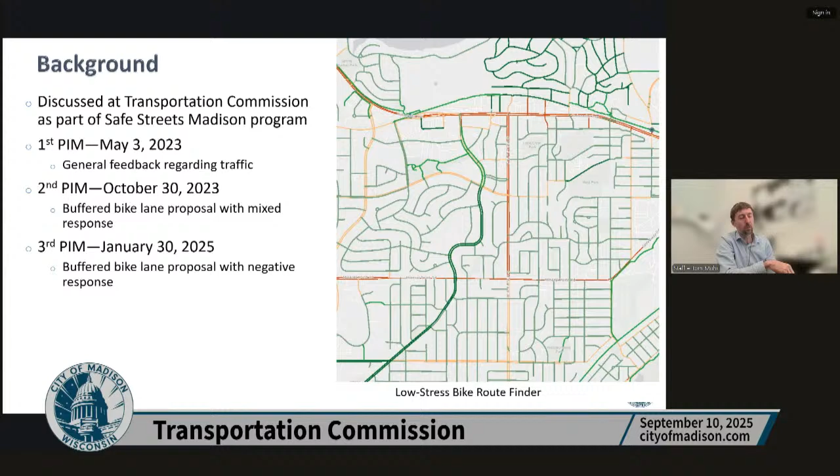We had a big attendance, over 100 people attended, and it was just a strongly negative response. So we left that meeting going back to look at different options, and that's where we're at right now.

Some other background that we shared at the public meetings and will refresh here: we have a complete green streets guide for the city of Madison that we've adopted. Within that, there's a modal hierarchy that places parking at the bottom, pedestrians at the top, bikes in the middle.

Midvale would be classified as a boulevard, although it's not. I wouldn't say it 100% aligns with the boulevard classification because of the single family residential and many driveways, but it's pretty close to that. So that's the classification.

Here are the different preferences for boulevards: sidewalks, possibly a shared use path on one or both sides, typically 2 travel lanes in each direction and medians. Protected bike lanes would be preferred, with median width to allow trees, which is what we have right now. So it's pretty close to that right now, except for the bike facilities.

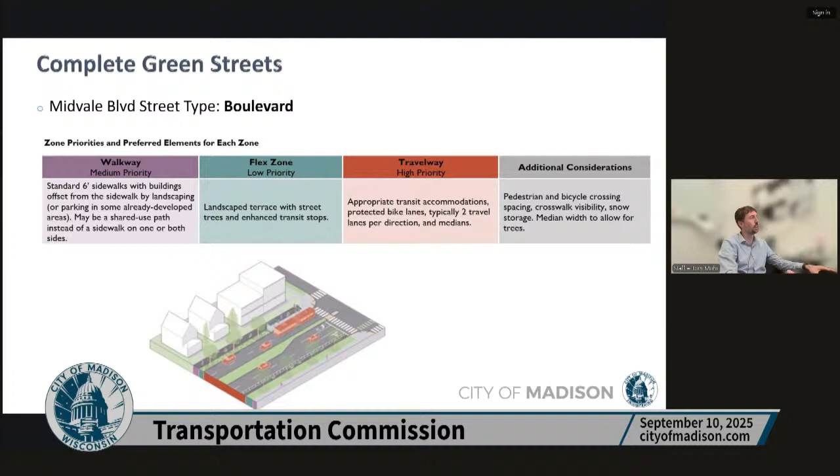There is no dedicated bike facility right now. We have a draft all ages and abilities bike network, but Midvale is not identified for that network—though this is just an initial draft.

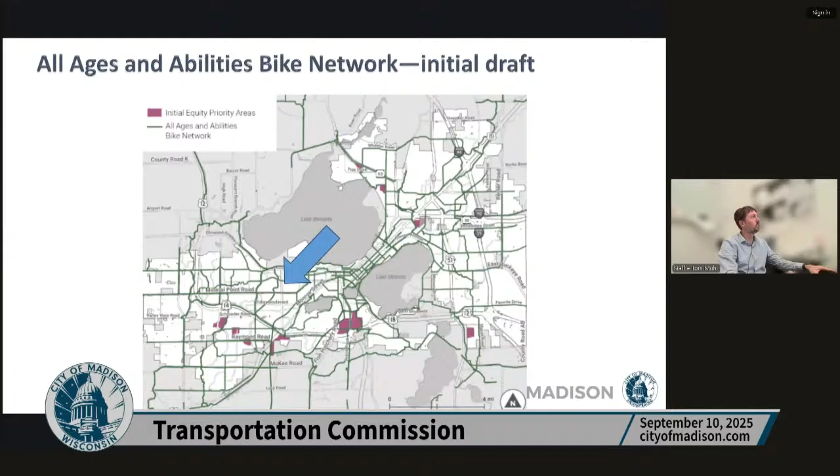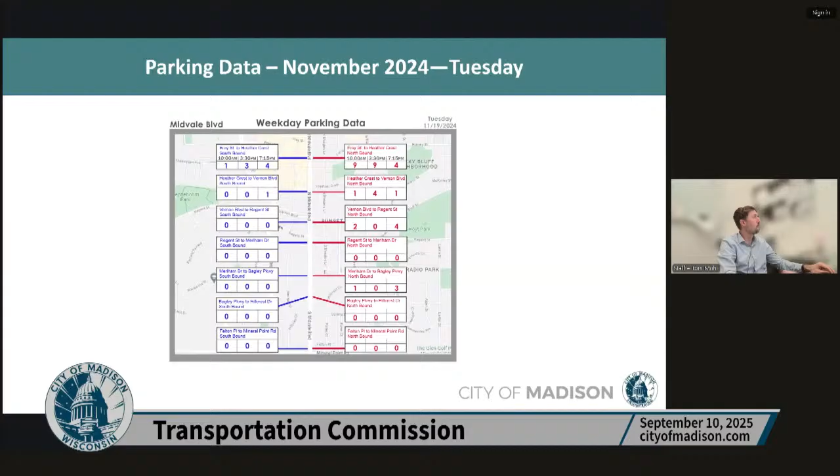So the design that we showed was a buffered bike lane: a 7-foot bike lane with a 3-foot buffer, narrowing up the travel lanes a bit but maintaining the 2 travel lanes, and removing the on-street parking. The reason for this is that Midvale's street width is about 3 feet too narrow to get a bike lane adjacent to a parking lane. South of Mineral Point Road we have that width and that's how it's marked out, but north of Mineral Point Road, along this section, it's a little too narrow.

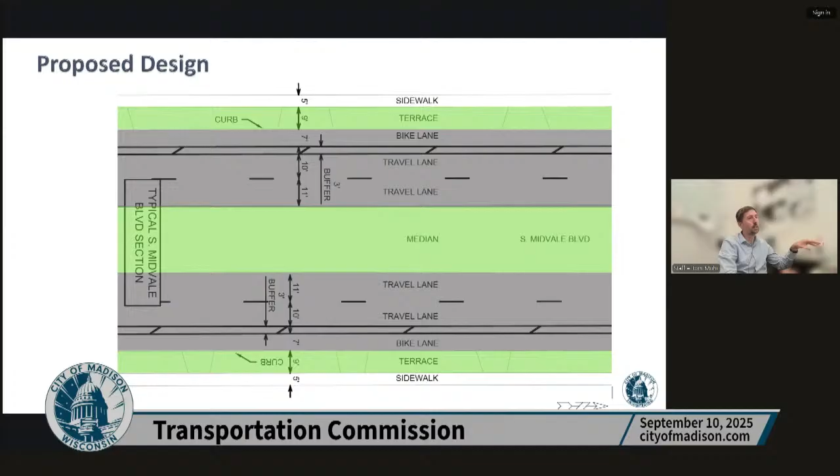So here's a plan view of that proposal that we showed at the public information meeting. Buffered bike lanes, north is to the right. Where the green box is, that is where we would cut into the median to get the extra width to allow us to have the bike lane next to the parking lane. Cutting into the median here, we wouldn't have to remove any trees. There's just kind of no trees along this area. More of the trees are to the south. So wanted to point that out.

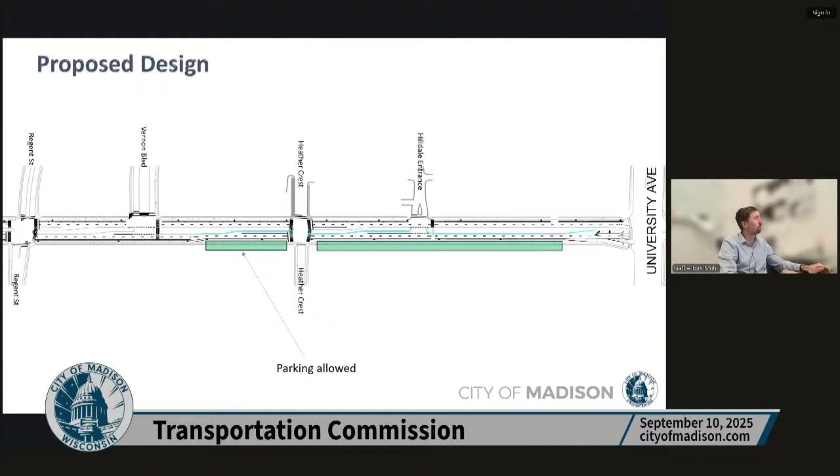This is just showing a little bit of a zoomed in view of that, how that would work. We could provide a little bit of a buffer, mark it out next to the parking lane.

So again, we took this proposal to the January meeting. Very long meeting, very negative overall response. Few people spoke in favor of it. So that's when we went back and looked at different options.

Some of the options that we looked at but dismissed are parking cutouts in the existing terrace. We could do that, but there's only a few locations where we could do that without disturbing trees, and it's also kind of difficult to make it work in the existing terrace. We could, but we'd kind of be choosing which areas would get parking and which wouldn't, and it's just difficult to do along that entire stretch of Midvale.

Another option was peak hour parking restrictions, like what we used to have on Doty Street during the PM peak, where it's kind of like a floating or moving bike lane. During the midday it would look like this, where it would be one lane with a bike lane and then a parking lane. And then during the peak hour, we would remove parking and have the bike lane shift over to the curb lane. But what we found in our one example of this that we previously had on Doty Street was that it was confusing. We had an overhead electronic sign that changed throughout the day to try to reinforce where the bike lane was, but overall it was confusing, even with the high utilization of parking.

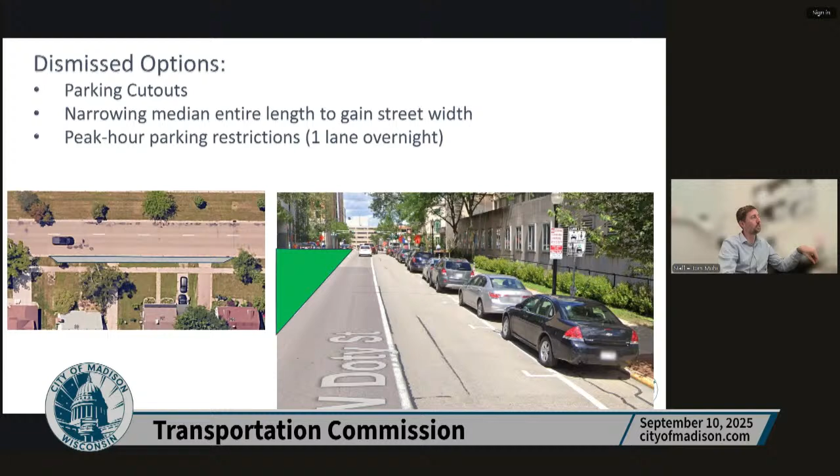So out on Midvale, there's very low parking use, especially to the south. So I think it would be difficult to get the message across to the public, both to people parking and to drivers, that it's changing throughout the day.

We looked at permanent lane reductions. We looked at hourly volumes in both directions to see what we could do if it was possible to permanently reduce a lane. Overall, it would be difficult. It may be possible under existing volumes, but volumes are increasing kind of to where they were previously. We have data going back to 2013, and it's part of the national highway system, so it's one of the few non-state highways that is on that national highway system. That also complicates things with doing a permanent reduction. But it is something we looked at.

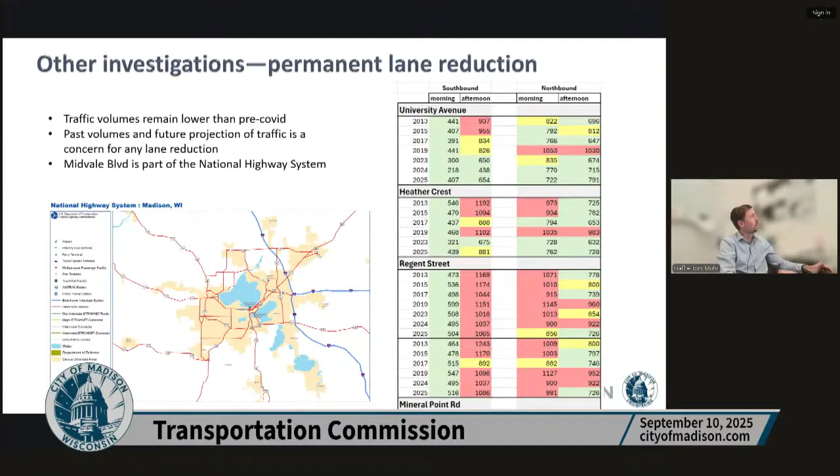So then we came up with three different options and put this into an online survey. This survey went live end of July, and it was available for five weeks. It just closed a week ago.

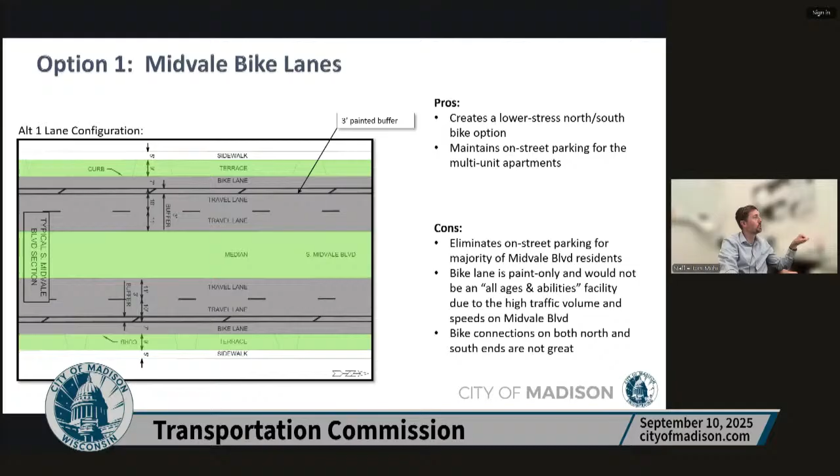So the first option was that initial proposal of the buffered bike lane, where we kept the parking on the east side. Again, this is what I showed previously. So this is what we included in the survey. We included the pros and cons and kind of explained the different options to people.

Option 2 was kind of partly using Midvale, but just the southern portion. So we would have to remove parking along that southern portion from Mineral Point Road to Bagley, and then create a bike boulevard connection up using Meadow Lane over to Blackhawk, and then using the new crossing that we are installing right now at the Blackhawk University Avenue intersection. There's going to be an RRFB there to help pedestrians cross University Avenue.

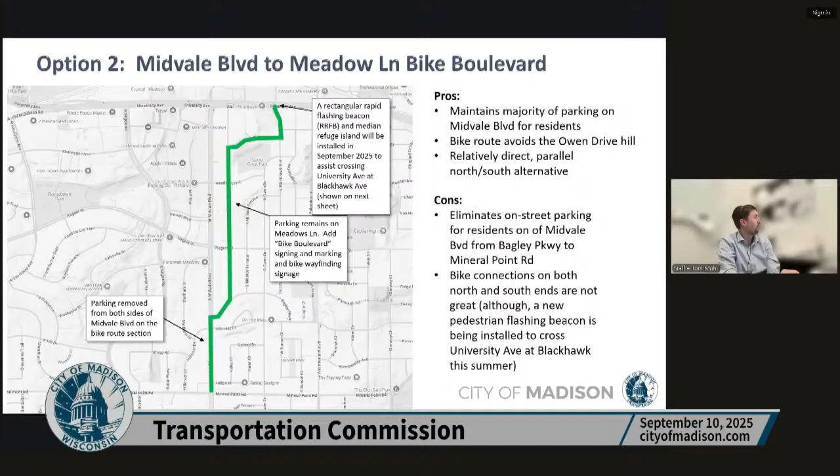But parking would remain on the rest of Midvale, and parking would remain on the other streets, only removed on Midvale to the south. So here's that new crossing that's going to be finished up this month.

The third option was to look at alternative north-south routes for bikes from Midvale, and instead use Owen Drive and Segoe Road, and then especially focus on improving the crossings of Mineral Point Road, because that's kind of the dividing line that makes these routes difficult right now.

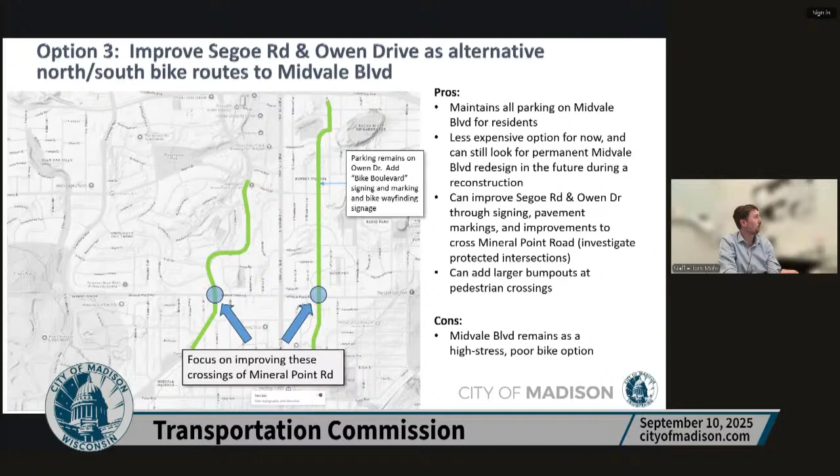So at Segoe Road, we could cut into the median at the intersection, provide some protection for the bike lanes at the intersection. This is feedback that we've heard from different users, that especially right turning vehicles kind of use that bike lane, and it gets crowded there. So we could provide some protection.

And then over at Owen Drive, we could get bikes off the street up to the crosswalks, where they could use the existing rapid flashing beacon on the east leg and install buttons on the west leg to provide that space. We'd install a new concrete island for a bit of a refuge, just to make this north-south route easier.

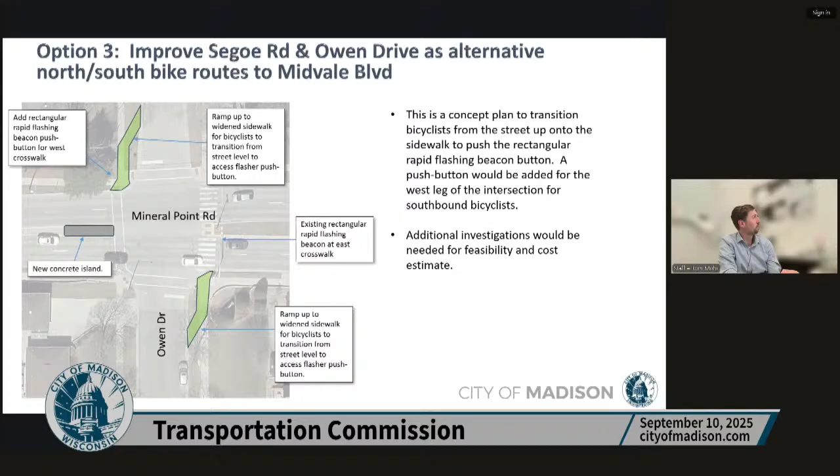With all the options, we provided that we can improve the pedestrian crossings regardless of what's chosen. We plan to add RRFBs at both Hillcrest and further north at the Hilldale Mall driveway. And then we can upgrade the existing signals—those are really old, really old infrastructure where we're really limited as to what we can do.

So we could upgrade those and change them to audible pedestrian signals, and look at upgrading the pedestrian crossing—just the curb ramps, median noses, and bump outs on either side of Midvale.

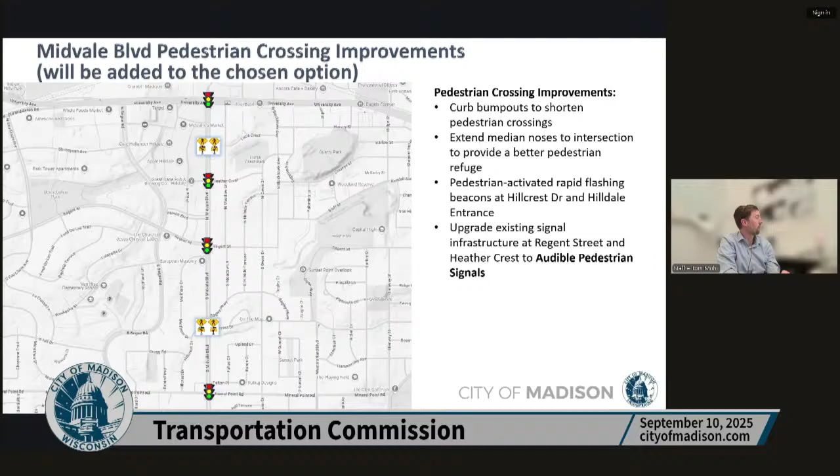So again, option 1 is the bike lanes all along Midvale. Option 2 is the Meadow bike route. And option 3 is Segoe/Owen Drive.

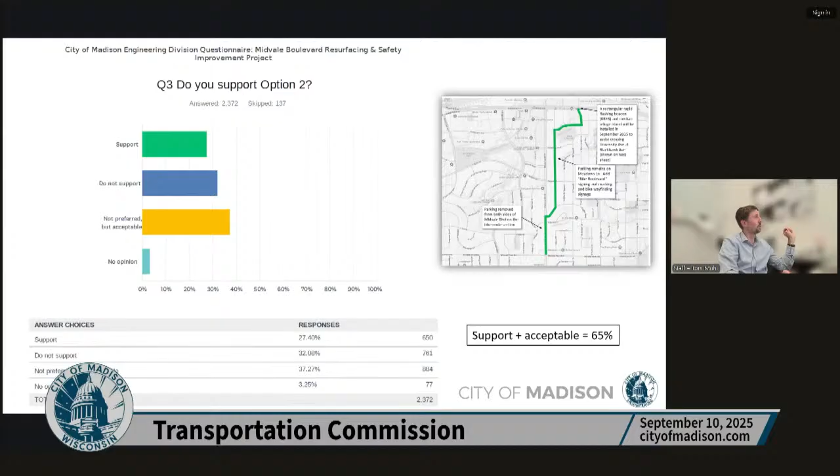So option 2: support plus acceptable is 65%, with 32% not supporting. And option 3: support plus acceptable is 74%, with 24% not supporting.

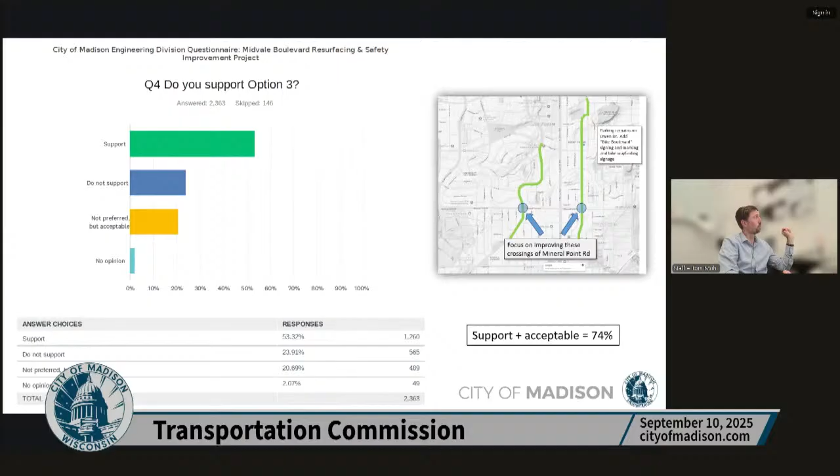So the last question was, what is your top choice? Option 3 won that with about 54%. But a huge response in the survey—over 2,000 responses—which is way beyond anything we've seen from previous surveys.

And then we did map these—the maps just showing how different areas of the city responded. So just the Midvale residents, this is how they responded, with 56% going for option 3 as their top choice, 23% option 1, and 18% option 2. So then just the Sunset Village neighborhood plus Midvale residents, this is how they responded.

So a little bit less support for option 3, a little bit more support for the other options. These are all city responses, excluding the people directly on Midvale or in the neighborhood, and it's still pretty similar. So I just wanted to show that there's not a huge variation in how people voted based on where they live. This is all citywide responses—48% choosing option 3.

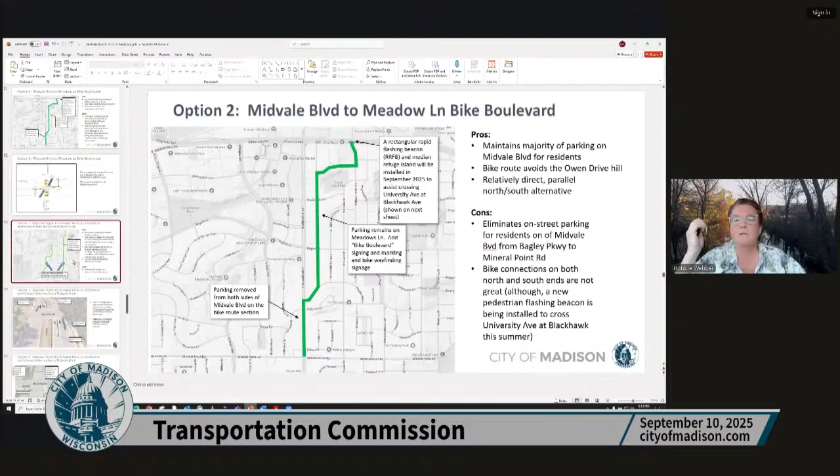Yep, okay, and then let's see. For Owen, they end up... I can't see actually where Owen comes out on. I mean, I see that there's, that little box is kind of, okay. So if you're on Owen and you want to continue south, then it's a little small because I'm on a laptop. It's hard for me to see.

Yeah, Owen going south. So this was, if we were to choose this route, we would look into anything more we could do, but Owen does have speed humps right now. Keating to Caromar then connects to the school. But we could look into further options further to the south for that route.

I mean, we'd pretty much be limited to like the bike boulevard treatment for this signing and marking. But if somebody wants to get further south on Midvale, then they somehow have to make a left at some point, an unsignalized left onto Midvale, right? Oh right, if you're on Owen and you're eventually making it over to Midvale? Correct, right. I guess they could go down all the way to Tokay.

Okay, yeah, I was having a little hard time with the map because that text box was over it and I couldn't quite see where it ended. Yeah, yep, so you can go all the way down to Tokay. Yeah, that works. Okay, so then...

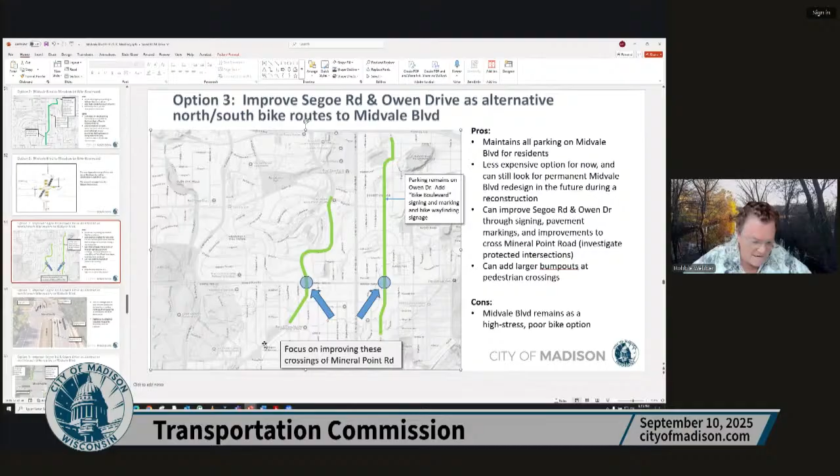On Segoe, have there been any discussions at all about a crossing of University Avenue and a route that would connect to the Blackhawk path on the north side? I mean, you've got what is that now, the state, is it Department of Revenue in that building? I don't know who's in that building now.

So we're talking right here at Segoe. We have not looked into anything further here. I guess right now, as a bicyclist, the proper way to do it - you can cut through the property, but the official route is to use Old Middleton, use the ramp to get to the path, or I guess depending where you're going, you could go east on University Avenue. If you're going east, yeah.

Yeah, so then you're kind of left with making a crossing somewhere along this point. So part of our issue with Midvale is that north of Midvale is the village, so we kind of need their buy-in to do anything on Rose Place or anything to the north here. I was just wondering because when people are suggesting Segoe, you just kind of get dumped, right? You get dumped onto a giant road, and a lot of people are trying to make that connection to that path or to Locust Street.

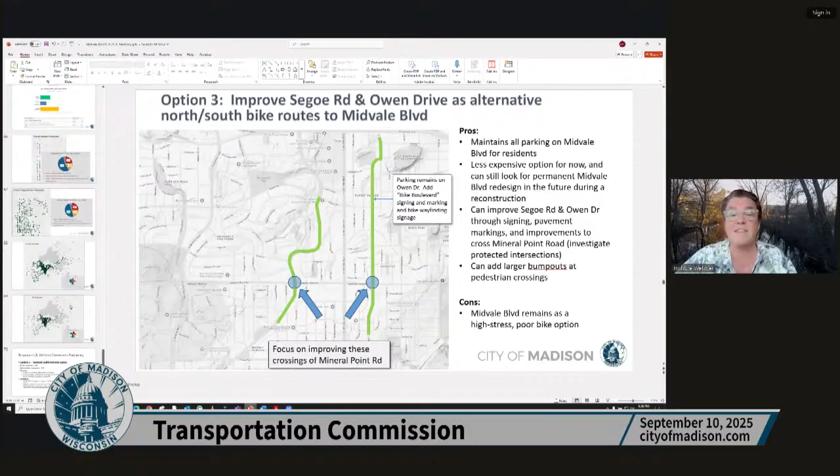I mean, I will tell you, because I do access the credit union and Walgreens and Pick and Save and the Ace Hardware on Midvale and Century, and the Great Dane Pub and Cafe Hollander, and many other things in Hilldale, I'm going to keep riding on Midvale, because that's how I cross University Avenue. And it's the only way that I can cross at this time.

And I'm not going to ride on the sidewalk, especially on the west side, because I've tried that, and there are a lot of pedestrians that come out of Century and walk up the sidewalk to get to the BRT stop, because that's where all the university students shop. Or not so much Century, but Target, and they also shop at many other shops. So that sidewalk is very busy. I'm not going to use that sidewalk, which means I'm on Midvale, and I'm going to continue to be on Midvale.

But I'm a much slower cyclist than I used to be, so I'm going to be in people's way, but that's the only safe way that I can see to access those destinations from where I live. And I'm coming from Locust and Rose Place. I will see if that RRFB works, but I am concerned, which means that would leave people with no way to cross University Avenue from Meadow or Blackhawk, and I think that's a disservice.

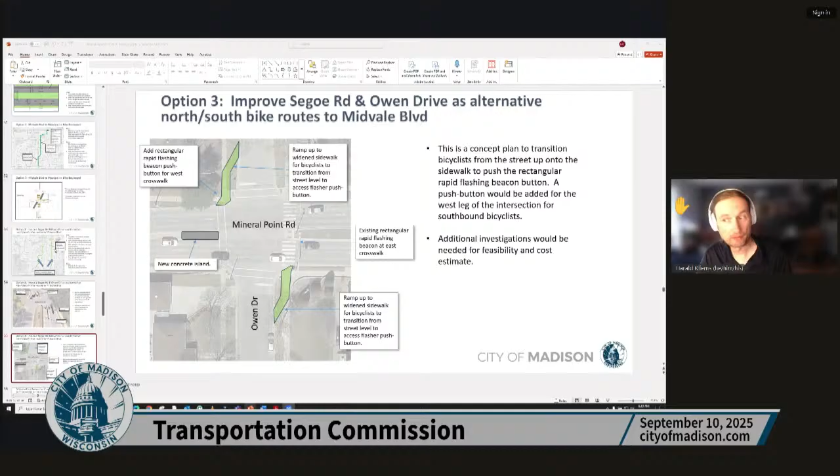With regard to the improvements presented in options 2 and 3, clearly the way the survey was phrased, and I think that's how people also understood it, is either you get bike lanes on Midvale or you get the other improvements. I'm kind of confused, why is that a budget thing? Do you see it as if we improve Midvale, then we don't have to make the other improvements? Can you explain how did you come up with these options that were presented as exclusive of each other? At least I think that's how I understood them.

Good question. It's kind of where should we put our focus? If we put our focus on Midvale, budget wise, we're trying to keep this within a resurfacing project, so we would not include other things as part of this project. We would probably separate that out into a separate project and not have it paid through the resurfacing contract, just for budget reasons.

So it's more similar to, say, the BRT project on East Wash and then the additional Safe Streets project that were kind of linked to BRT and not having a facility on East Wash, but they were separate contracts, came back to TC, happened in different years. Some of them we learned were more difficult than we anticipated. So that's probably what we would do here, if everyone's good with option 1, we'd probably come back with Safe Streets projects to look at Segoe and to look at Owen, and evaluate those through the Safe Streets program.

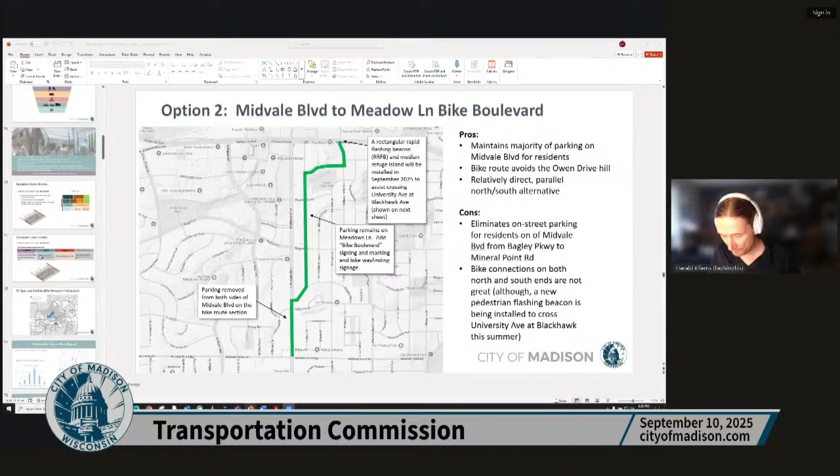Other big picture items: you presented the Complete Green Streets Guide. It's a boulevard, so according to that it should have a protected bike facility. You showed the no-stress bike network where Midvale was not included, but I think some commenters mentioned it, and also in some written comments it was pointed out that the area plans have Midvale as a bike connection. Is that correct? Yeah, I can bring that up separately. The West Area Plan has Midvale identified as an on-street route protected bike facility.

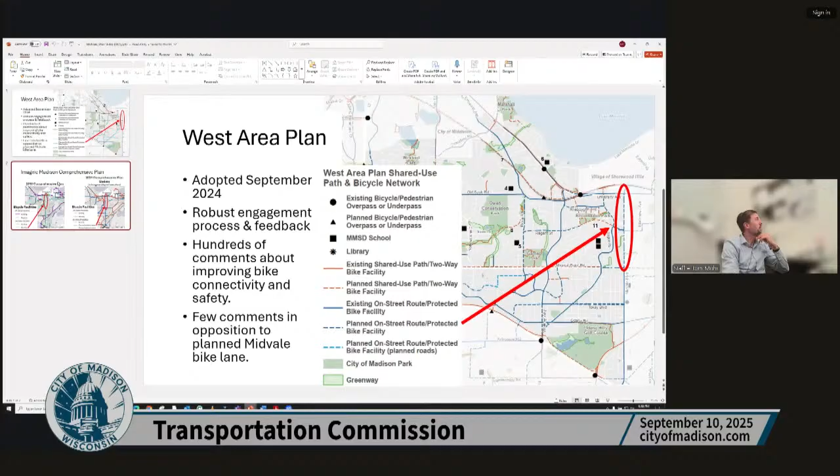This was adopted September of last year. There was a feedback process for that, and at that time there were a few comments opposed to it, but it definitely wasn't discussed at the level that we're looking at it now. And then the Imagine Madison Comprehensive Plan also identifies Midvale. So two different plans here, it was updated to have on-street facilities in the last plan.

Okay, thank you. I mean, I guess you can make an argument, these are area plans, so they don't specify we need to implement this now, so you could argue maybe we'll do it in the reconstructions 10 years from now. But okay, that's good to know that there are several plans that call for low stress bike facilities on Midvale.

The topic of speeding came up, and this was a long time ago in 2023 when this first came as a Safe Streets project. I think speeding was one of the concerns that first put it on the list, in addition to bike concerns or not having bike facilities. Do you have a sense if option one is going to help with speeding, or some of the improvements with bump outs?

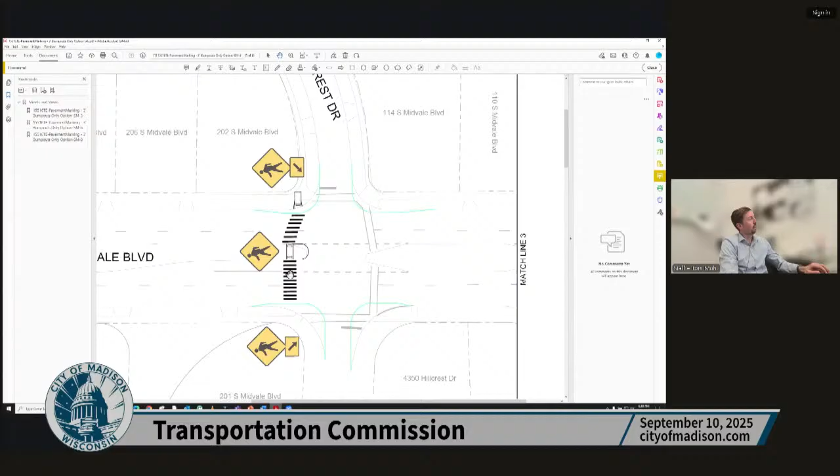Based on experience from previous projects, option one, just a painted line, is going to have close to no effect on speeding. Bump outs, I can show what we've dreamt up for what the bump outs may look like. They're not as big as we would like because we need to maintain the turning radius for vehicles. These are showing 3-foot bump outs. If anything, these would have more of an effect on speed.

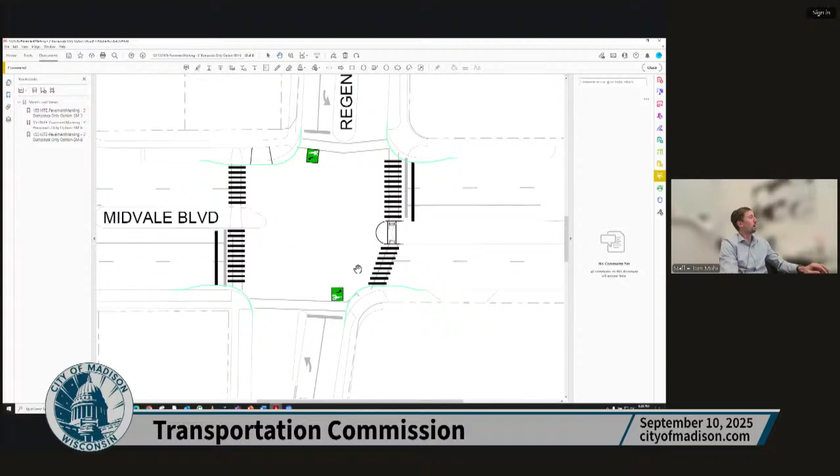So we've got bump outs at Hillcrest, Regent. Again, a lot of these are based off of maintaining truck turning movements to different places, so the truck doesn't have to take the other lane. I think these are also 3-foot bump outs, and then at Heathercrest. So we can shorten up the pedestrian crossings a little bit, might provide some narrowing of the feel for slower speeds.

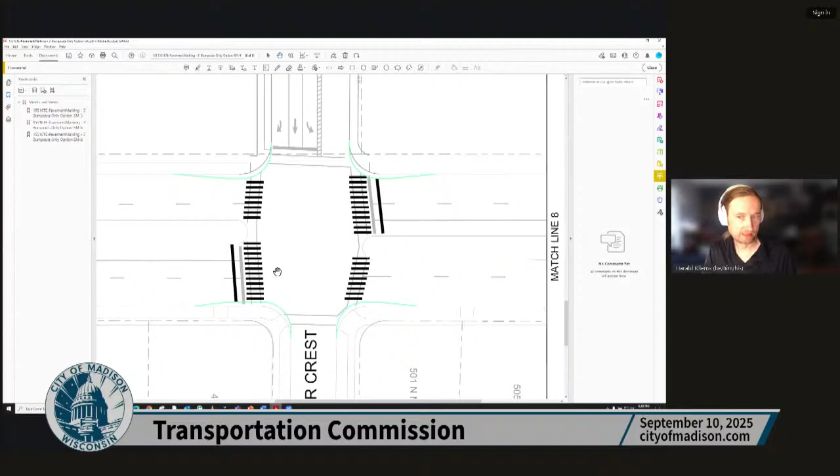Yeah, I mean, in general we have argued that making lanes narrower does provide a speeding reduction benefit. Especially in a case like this, where the right lane looks like it's 20 feet wide when there's no parking. So I would expect that paint probably has some impact.

Actually, one thing I didn't mention that we are planning to do regardless - say we just leave Midvale alone as far as parking and lane configuration - we do plan on adding a lane line or lane lines on the right side here to designate and narrow up the feel of that right lane. A lot of the time, if no one's parked for a block, this is like a 20-foot lane, so we will mark that out to provide some sort of narrowing at least.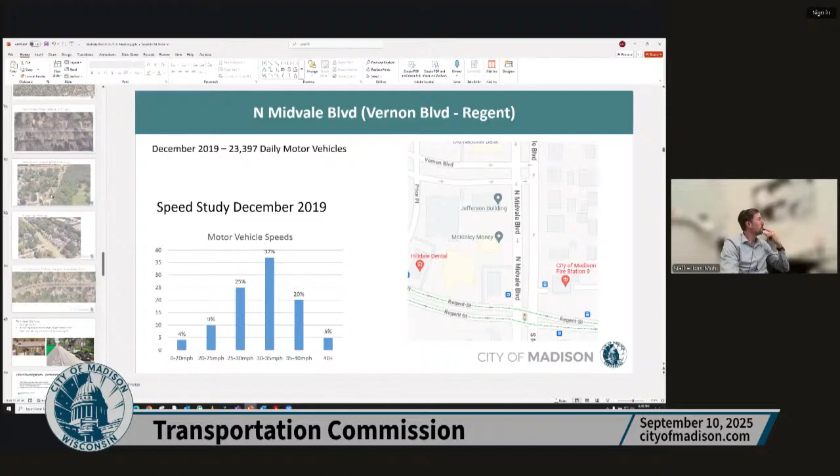Okay, and that maybe ties into my last piece. Can you go back to that slide that showed the traffic volumes? Talk a little bit - some people brought up the lane reduction idea. Yeah, so right here.

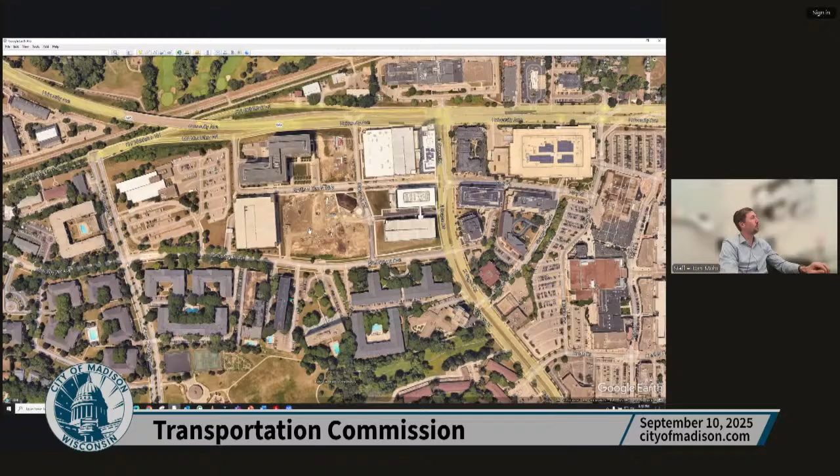But part of this is development at Madison Yards - they did a traffic impact analysis that showed additional volume coming from there using Midvale, and you can see they're still not fully built out here, so they do have some space for more development. And then there's impact to businesses in the Hilldale area. I think any sort of lane reduction is borderline at best right now, and we can at least in this area achieve the same thing with what our original proposal was, to cut into the median. So that's kind of why we backed off of looking too far into that lane reduction.

Yeah, I mean, it was striking to me to see the traffic volumes basically being flat over the whole period. I don't think there was any location where traffic volumes were higher than they were in 2015, neither in the AM or the PM, which is a separate question from what the absolute volumes are. But projections about the future are always uncertain, I suppose.

Okay, I think you started early on that Midvale is classified as a boulevard and complete green street, but it only kind of fits, and I think you mentioned the driveways being what makes it different. A boulevard is supposed to have longer blocks with few driveways.

But there are many driveways here, and that's part of the reason - this was another thing brought up that I could address - the protected bike lane. It's difficult to do any sort of protection when you have this many driveways and this spacing of driveways, because we need to keep in mind we've got to have access to the driveways - people have got to be able to get out and in. So it really ends up in a really disjointed protection. If we were to use curb or something, you can compare it to Segoe Road, where there are very few driveways, so that opened up the opportunity to do concrete protection for bikes with just openings at the few driveways. But Midvale is a lot more difficult for that protection.

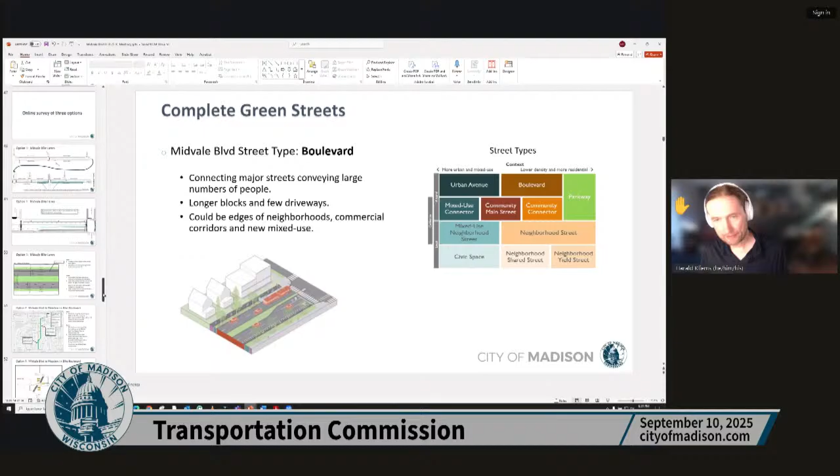Okay, and do you have information on the gradient of the different streets? I know Owen has a very steep section, Midvale has a different steep section, and Segoe is pretty level. That's my rough summary from my own experience.

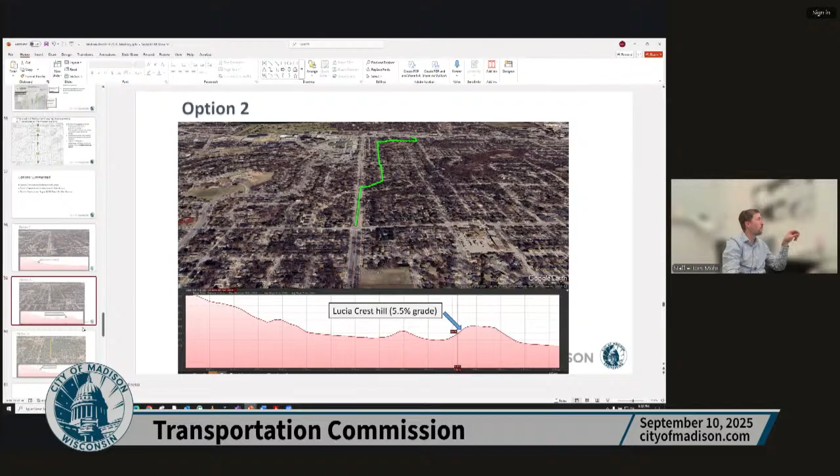With this route, there are some steeper hills, like this one up by Lucia Crest. It's a smaller hill, but still steep for that short period. Owen Drive has the biggest hill - Mineral Point Road is up high, and as you go north you drop down a 6% grade to University Avenue. So Mineral Point Road is generally lower down at Midvale and then goes up, that's the extra grade for this route.

Okay, that's useful. Regarding the Mineral Point crossing, I know a long time ago there was a proposal to potentially reduce the number of lanes on Mineral Point there, and it didn't go anywhere in the end. Is there still some thought on that? Because that would make a big difference for crossing compared to keeping it two lanes in each direction with an RRFB.

Yeah, that's a study we're still working on, so we plan to bring that probably next year. We'll do the whole public engagement process with Mineral Point Road and analyze the data. So that's still in the works, and it's very similar to Midvale - it's a resurfacing project from Midvale to the east. It'll be a similar discussion about what we do with the street, whether we can reduce lanes or provide better pedestrian crossings. It's really difficult to cross Mineral Point Road at a lot of these intersections, and parking utilization is low there too, probably even lower.

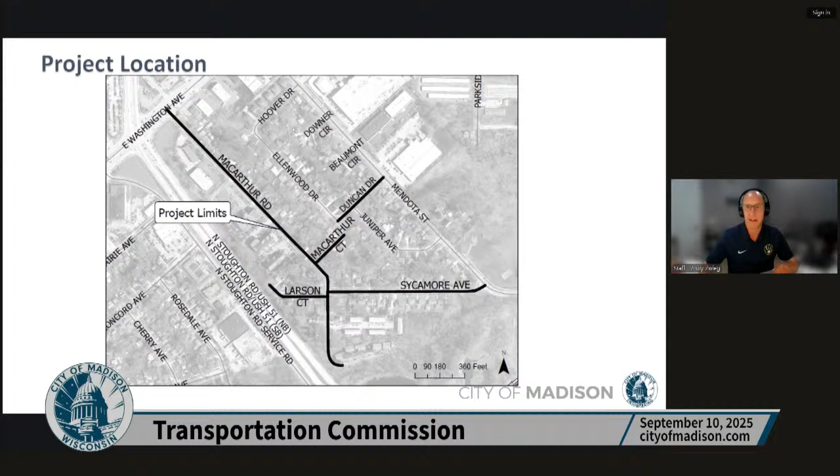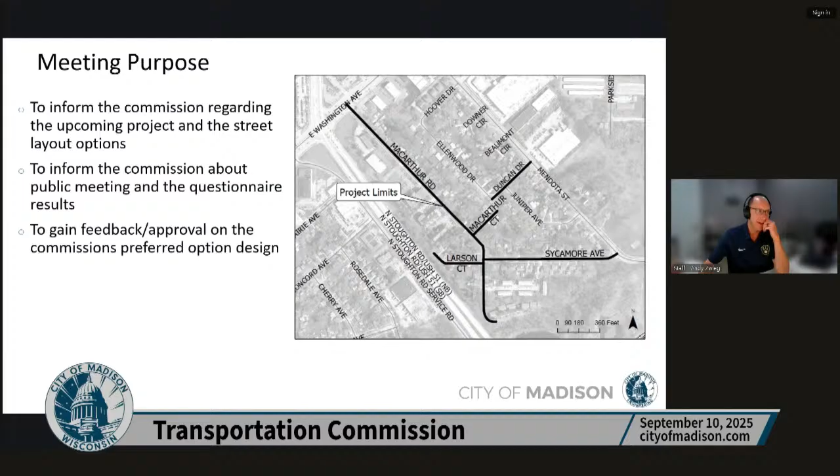We want to inform the commission about the upcoming projects and the street layout options we presented to the public, inform them about the public meeting and the questionnaire, and gain feedback and approval about some of the options we laid out. So where we are in the process: we had a public meeting in October of 2024, a year ago, prior to really starting the project. The alder requested that we meet with the neighborhood to talk about what's coming and how these projects go, since it's pretty significant when you go from no curb or sidewalk to curb and sidewalk. Following that, we had residents ask us to go through a walkthrough around the project, talking about the neighborhood and things residents have heard from neighbors.

That walkthrough was November 19th of 2024. We didn't do anything over the winter because we were waiting on survey for the project, so we started the project in roughly June. We established some geometry and some options, checked in with the alder, got our presentation in order, and had a public meeting on August 27th, 2025, just a couple weeks ago. So right now, the Transportation Commission's next steps would be board approval of plan specs and assessments, and then the council after that.

So we did a speed study. This was traffic engineering - they found that on MacArthur Road, and this is Sycamore here, there were no significant issues with speeding, not a lot of vehicles going over 30 miles per hour. What we've heard from residents is that there is speeding, and that this is a cut-through for folks from East Washington going to MacArthur to get to Sycamore. When I was out there, I would agree that there were cars that were not necessarily driving to their homes, but cutting through MacArthur and Sycamore.

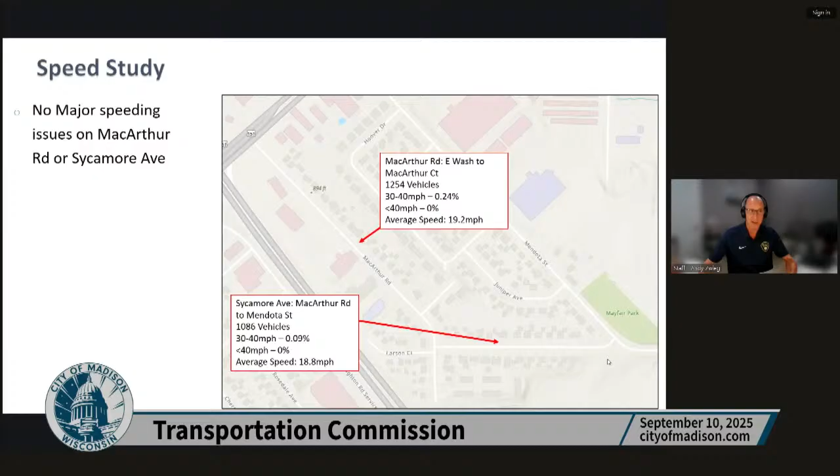Parking study: right now there's no parking on MacArthur Road in this section existing. There is parking on Sycamore, but that's restricted to daytime only. The neighborhood went through a process years ago with a petition to try to get rid of evening parking, and that went through, so that's currently in place. The parking study didn't show too much parking at all, at least in this area. We also did weekend parking counts, which showed a little bit of weekend parking on Sycamore, where parking is authorized. These other courts, I think it's not necessarily no parking, it's just not signed - they're pretty narrow and really dead ends, just residents on the court.

Weekend counts were taken during the mid-evening. So here's what our proposal is, starting with MacArthur Road.

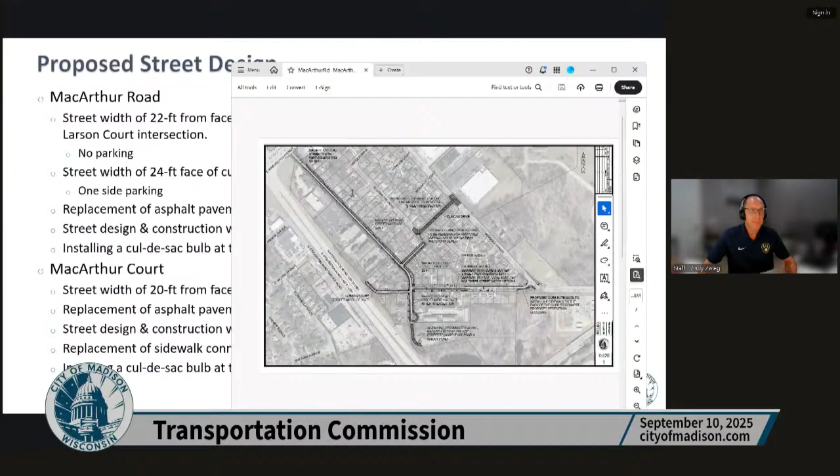MacArthur Road from Sycamore to East Washington, all the way to Sycamore, would be 22 feet. In our public engagement last October and November, at the annual meeting, residents really did not want parking on MacArthur Road in these blocks. They wanted to keep the road narrow. The representative we talked to also clearly stated they didn't want parking. So it was pretty collaborative going into the design this summer that MacArthur Road in this section, from Sycamore to East Wash, needed to be 22 feet, no parking, keep it narrow.

We got a lot of input from the neighborhood on Sycamore on why they wanted to limit parking in this section, because a lot of these apartment complexes have multiple vehicles and they park all over the neighborhood. So other residents wanted to limit parking on Sycamore. Going back to our proposed design, we would propose MacArthur in this section be 24 feet to allow parking on one side, to try to pull vehicles off of there and put them closer to their apartments. It's not a really long stretch, there's a couple of driveways in there, so there would be a few spaces accommodated as well.

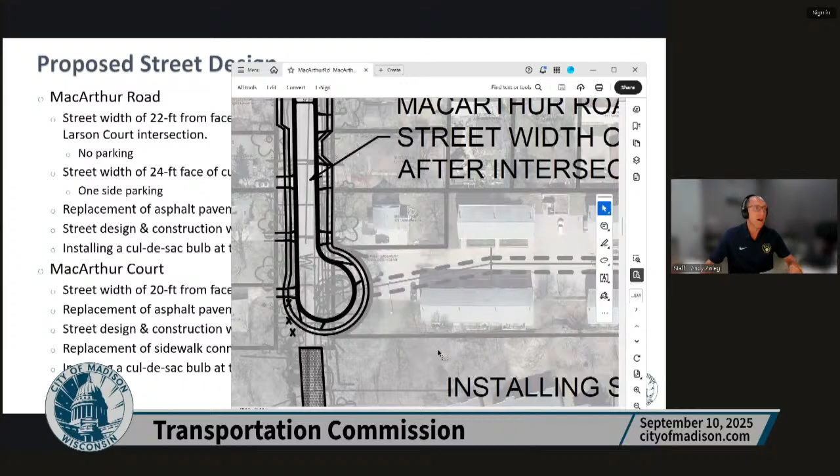The overall project on all the streets is to remove the asphalt, gravel, driveway aprons, curb and gutter, sidewalk. MacArthur Road has sidewalk on the west side, no sidewalk on the east side. When you get down to MacArthur Court, between MacArthur Court and Sycamore, there's no curb, no sidewalk.

We also talked about installing a cul-de-sac with a 30-foot radius at the bottom of MacArthur Court. MacArthur Court is currently just rural, no sidewalks, no curb. So the proposal is 20 feet face to curb, and put sidewalk on both sides.

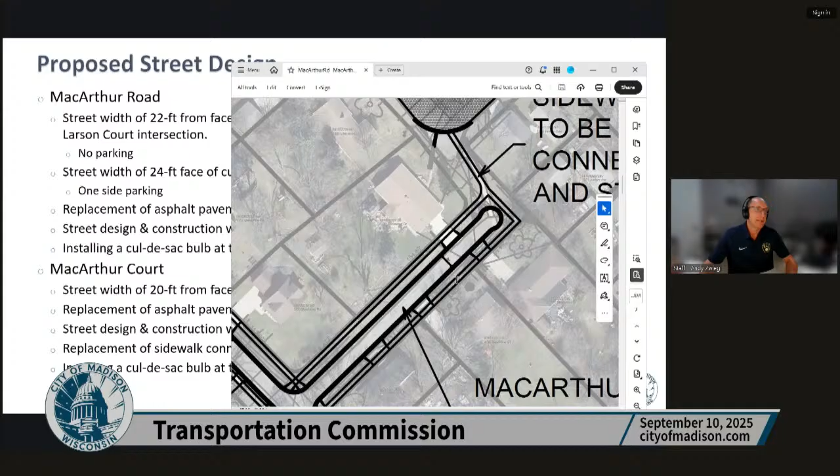Recently, if TC members have reviewed some of the comments, it's been requested that we put sidewalk on one side on the cul-de-sac. Engineering feels sidewalk is warranted on both sides because horizontally it fits, the right of way is wide enough. There's an existing connection here to Duncan, and when we were out there, we did see residents using this connection. So we figured you definitely need sidewalk on one side, and with keeping MacArthur Court at 20 feet, it fits on the other side horizontally.

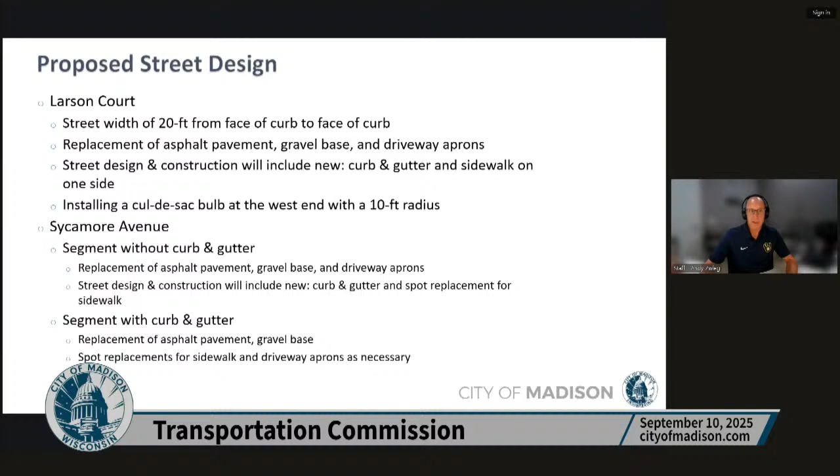So Larson Court, there's a tighter right of way on Larson Court and some trees that are preventing it from having sidewalk on both sides.

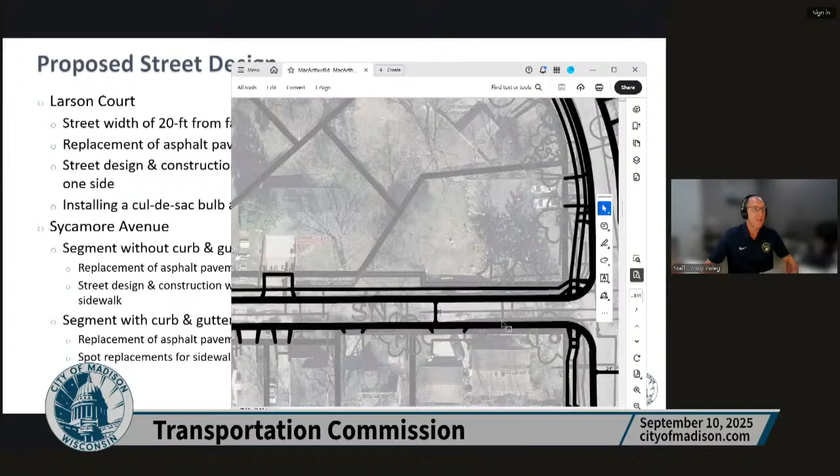Why we feel sidewalk is warranted on one side is because in the future WISDOT is planning to reconstruct the East Washington and Stoughton Road intersection, and put a path along Stoughton Road on the east side. Connecting that path with Larson Court was something we kept in mind, which is why we have sidewalk adjacent to the curb here. Again, Larson Court is 20 feet. It was really tight on the south side with some really mature trees, both in the right of way and private property, so with the trees it would not fit, at least on this side of the project. It does fit on the north side.

So to be clear, the engineer did not present any options on what I just talked about to the public for street width or sidewalk discussion. We did not propose MacArthur as either 22 or 24 feet. We clearly heard it from the public last fall that is what they were looking for regarding street width.

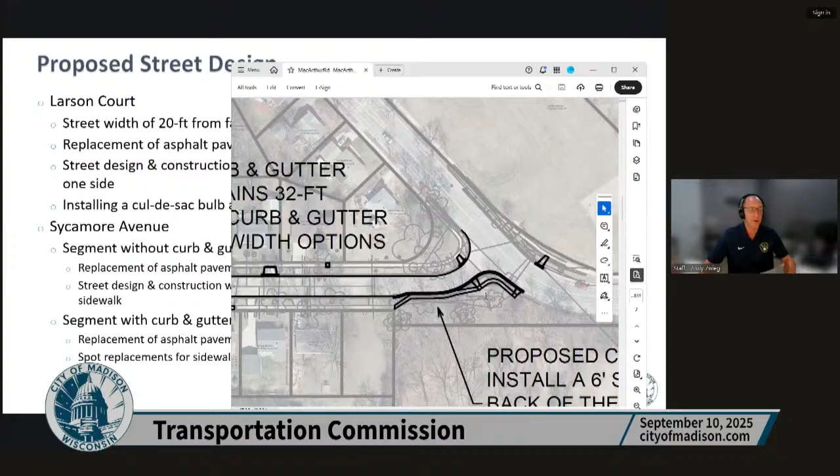We're just planning on tearing up the pavement and putting it back, then fixing driveways and sidewalks as needed. We're also planning to continue the sidewalk on the south side to Mendota, creating a safe crossing from Sycamore and Mendota to the park over there. So, the unfinished section of Sycamore, we put out to the neighborhood.

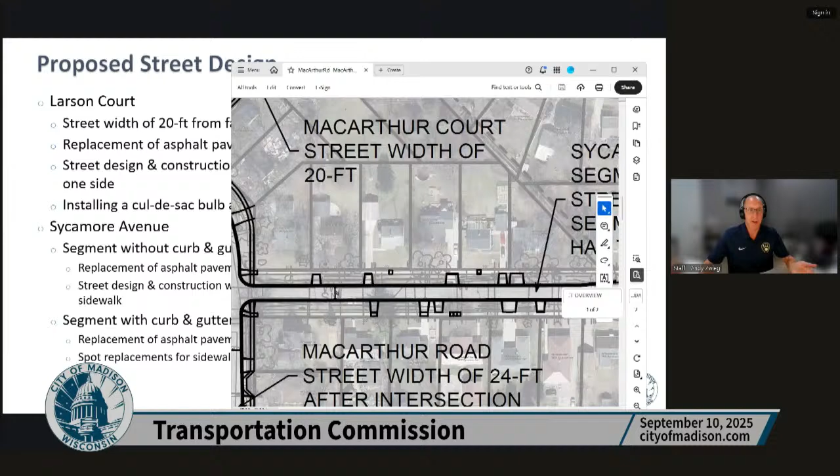First option we put out was 22 feet with no parking in this unfinished section, coming out of the wide terraces. That was one option. Second option was 26 feet with parking on one side. Terraces are still good for trees and potential rain gardens.

As requested, the no overnight parking restriction would be maintained, since that request has been made multiple times. So from this perspective, our recommendation is that Sycamore be 26 feet with parking on one side. Last option was 30 feet, parking on both sides, with that overnight parking restriction still maintained.

Here are the results. For option A, we had 60% support, hearing a lot from the neighborhood about slowing traffic down and wanting the folks who live in the apartment complex to not park in the neighborhood. Option B, 26 feet, had just as much support as do not support - it's something people can live with. Option C was not really supported.

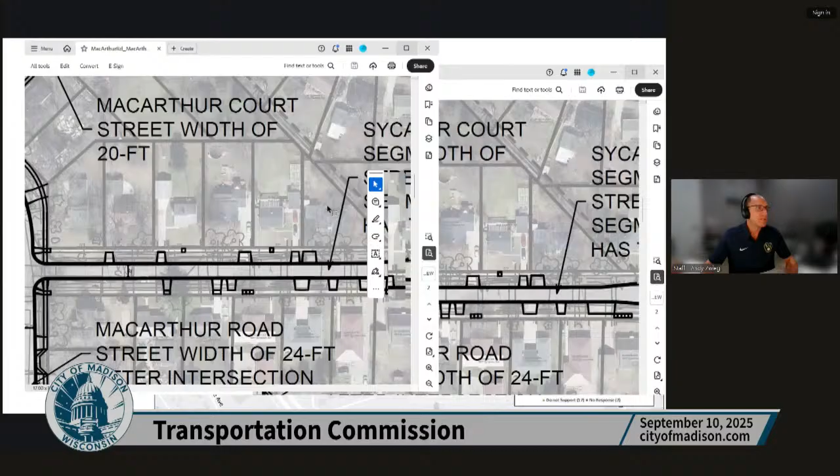All right, so I can talk about some of the comments we've received. Also, I want to talk about the sidewalk a little bit more - here's my exhibit. The sidewalk fits horizontally, and we have it proposed.

Trees. So with the sidewalk layout right now, we have 3 tree removals. That's down here at the cul-de-sac. Forestry has told us that anywhere we put the sidewalk in this corner, we came up with a few different options, the trees would have to be removed.

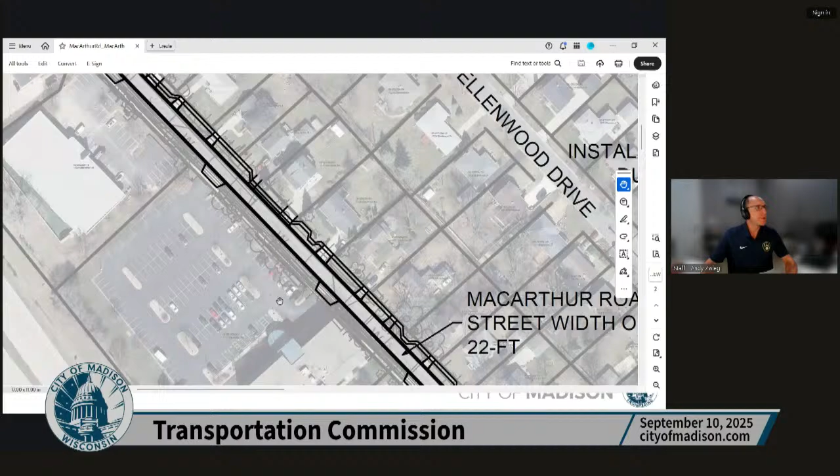Going back up to Sycamore, we're showing our sidewalk kind of go in and out like this. What I want to tell the commission was that I'm confident that the sidewalk can go in. What I'm less confident about is exactly where in the terrace. Is it a 5-foot terrace?

Is it an 8-foot terrace? We'll know more of that when we go through the vertical design. We haven't got into that yet because we like to get all the committee approvals before we dive into that. But we're going to be able to make this look a little better.

We have total, we have the 3 tree removals because of sidewalk. We have 12 right-of-way trees that were avoided by moving the sidewalk in and out. And we have 10 private trees that we're avoiding by moving the sidewalk in and out.

Forestry, so what happened is we drew all the sidewalks at the right, and forestry marked up, okay, you need to, this is tree sensitive, and so we moved the sidewalk around, and that's kind of where we're at right now. So once we get feedback and your approval, we'll go back and move forward with forestry a little bit.

There is an extra sensitive area on the street with trees. This is between MacArthur Court and Sycamore, where we have some really nice trees, where the sidewalks can be really tight against the curb. The streets can be, we have 22 feet.

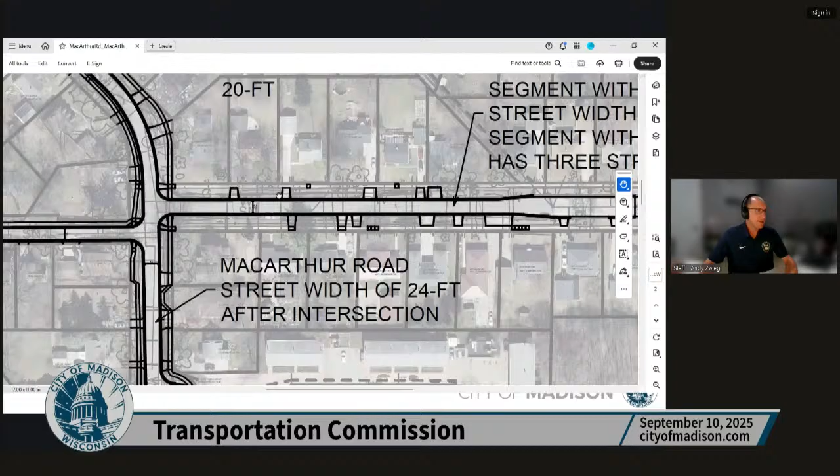Let's see, let's talk about. So recapping, I'm looking for feedback and approval of staff's recommendation and what they would like for Sycamore options, 1, 2, or 3. And just general overall feedback, if there is any.

We did hear, so in the, a resident asked for engineering to share the responses to the questionnaire.

I did include that, broke that down, because there's a lot of residents that are upset about sidewalks. Overall, out of the 39 responses, specifically in the questionnaire.

Now, we put the question there, do we want sidewalk or not? That's not something that we typically do. That's not something this committee would want either. So there were 7 responses of folks that did not want sidewalk in the questionnaire.

Let's move that, and I'll stop talking and ask your questions and feedback.

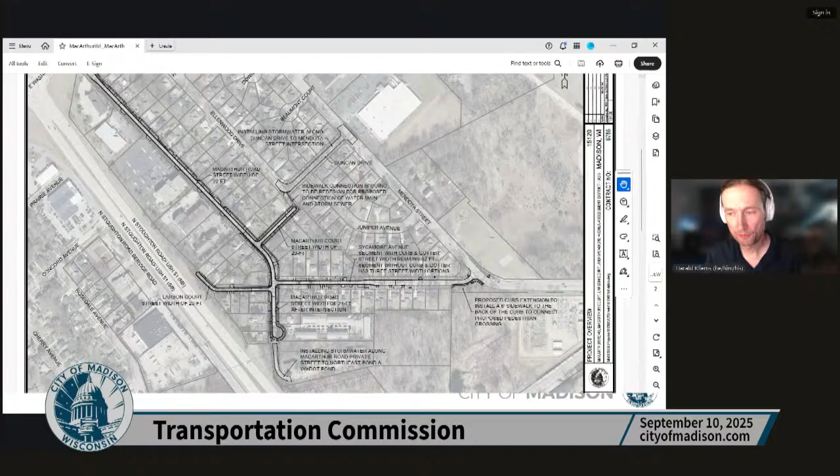One question I have, when you showed the survey results, it looked like nobody from the multi-family housing at the end of MacArthur Road actually responded.

Is that correct? Correct. That's correct according to the survey.

I think we'll have to try to get a hold of them because it's very impactful to their property. But to answer your question, no.

I would encourage you, sometimes it takes a little extra effort - I guess these are townhomes - but making sure, both from the management companies if there is one, and also trying to get some input from tenants would be good.

Can you tell me why staff recommended option 2 over option 1? I think the difference is 4 feet of additional width and one side of parking, but not overnight parking, right? That's the difference between option 1 and 2?

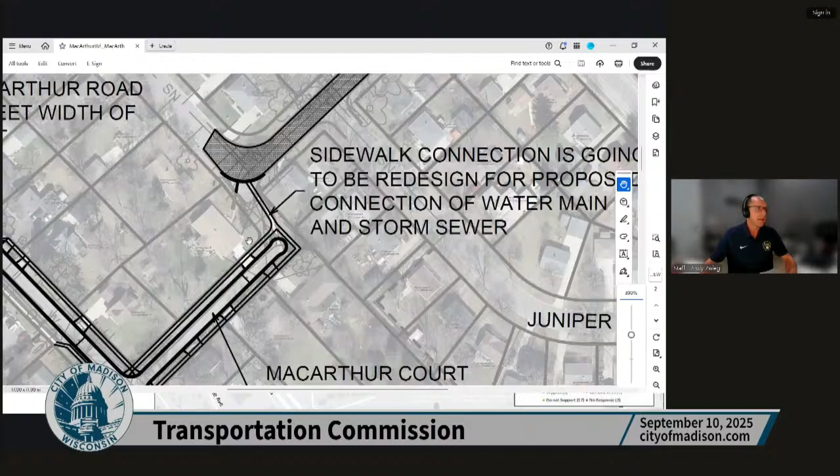You said MacArthur Court? So what was your question? Are you going to make changes to that? Is that going to be wider or anything?

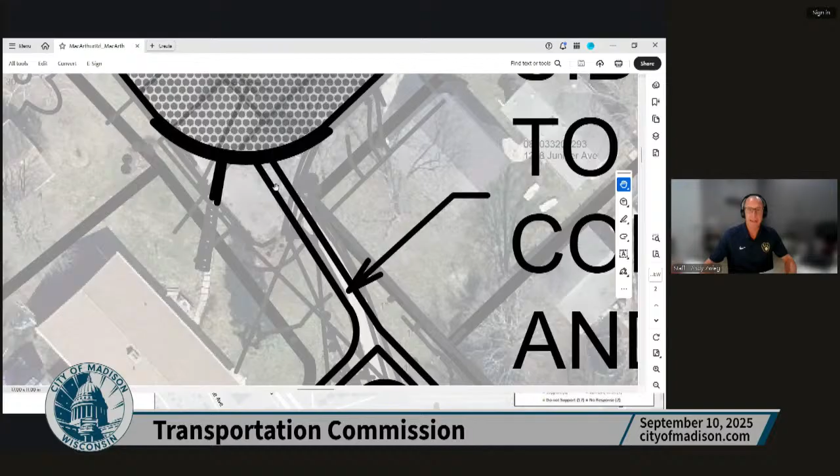Right now it's really steep. The actual road goes here, and we're going to pull the road in and lengthen that to get it to be 5% or less - right now it's way over 5%. We haven't talked about the width lately. I think there's definitely space and flexibility for some widening, and that's something we can certainly look into. The ultimate goal is to get it flatter and pull in this curve.

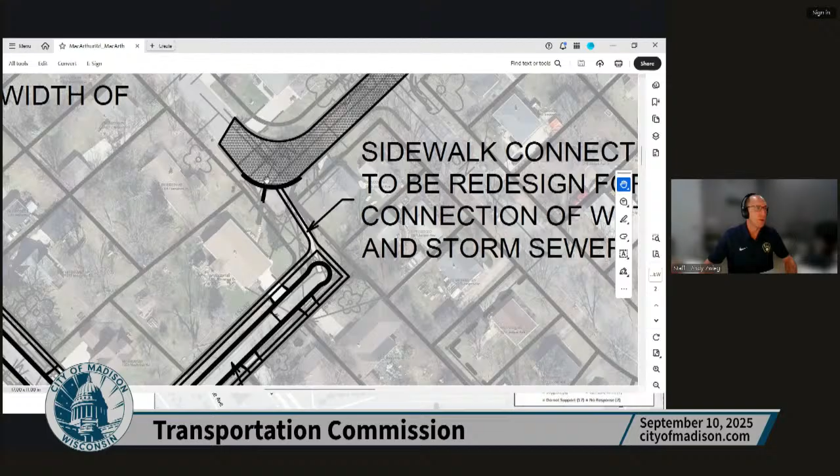And I didn't talk about this work on Duncan. We also heard that there's a significant amount of stormwater that runs down this path and creates ice problems in the winter. So the thought is to pull the storm sewer up. Duncan is in good shape - curb and pavement in good shape. So from a surface treatment standpoint, we wish we didn't have to get into Duncan, but it makes the best sense to pull storm sewer up from Mendota and put an inlet here to collect water.

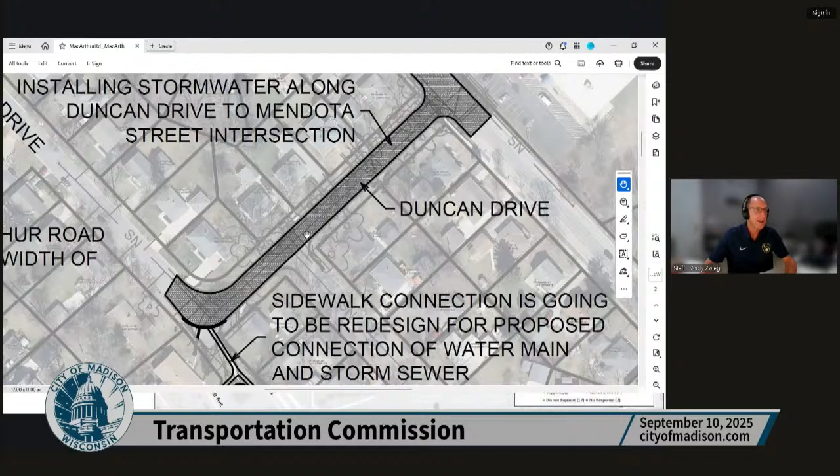And get that out of the area where the path transitions to the street. So that's why Duncan is slated for just storm sewer work and then a resurface, because it's in good condition. But yeah, improvements to the path, this connection, is absolutely something we will do.

I think just when you can make those 8 feet wide - I know a lot of people use them, mobility devices, biking, because they're super convenient, you can just cut through the neighborhood in a very quiet spot. But when they're like 5-foot sidewalks and there's vegetation not really managed from both sides, then they can be kind of narrow, or if there's a lot of pedestrian traffic. So that's good - yep, that's all I had.

I don't think - I know you were looking for opinions on option 1, 2, or 3. I honestly don't have strong opinions. More people from the public, even though it's a subset of the public, supported option 1. It's less permeable surface slightly. So no strong opinions on that - I'll leave it to other commissioners.

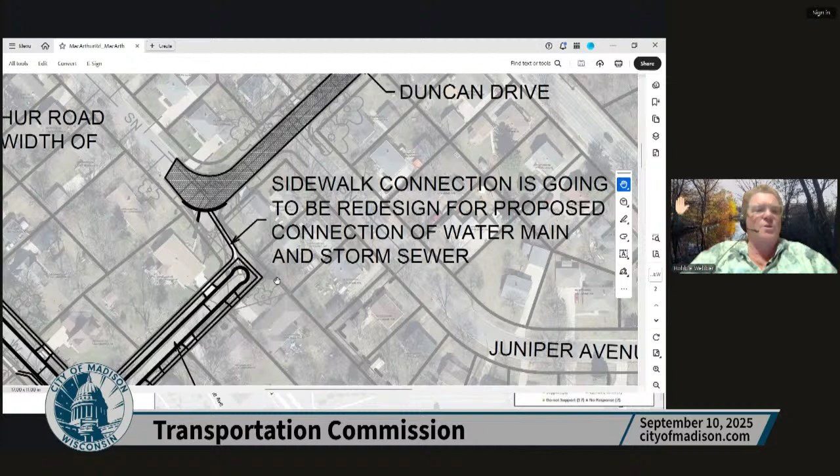I think some of the things Harold asked were what I was going to ask as well, because I also had trouble following some of the details due to the audio problems. But if I understand correctly, you're putting sidewalks on both sides of all the streets that are going to be worked on, except for Larson Court, which would have sidewalks on one side. That's the staff recommendation - is that correct?

Correct. This section of MacArthur, this long section here on the west side, already has sidewalk. But yes, to answer your question, yes. So all the streets except for Larson would have sidewalk on both sides.

Correct. Okay, and then I just want to clarify again that the reason staff is recommending option 2 on Sycamore is that there are people currently parked there, so you feel like there is a need for parking, but people who responded kind of felt like they could take it or leave it with parking. Is that what we're hearing?

So I would say for the residents on Sycamore, it was unclear. It didn't go, we all support the parking, we all don't want the parking. I think they were fine to keep parking on one side, but what was important to them was the parking restriction. I think a lot of the survey was from folks on MacArthur Court or MacArthur Road who live close to Sycamore as well.

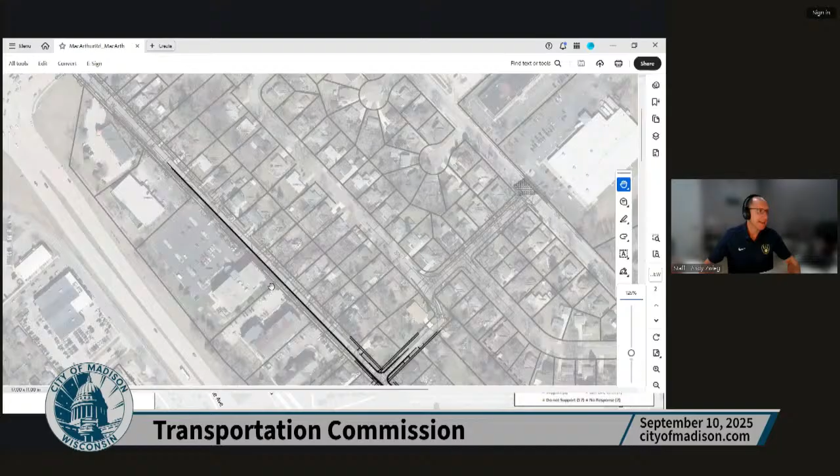One other note is MacArthur Road, 22 feet. We didn't hear much at all about people wanting parking on MacArthur Road. We heard it, did not hear it last fall. There was someone that reached out about wanting parking on MacArthur Road. So I am not proposing to change anything. I was just going to tell the commission that I was going to be open to maybe creating a parking pocket somewhere if needed, but I would have to thoroughly vet that with traffic engineering. But I'm not looking to change from 22 feet.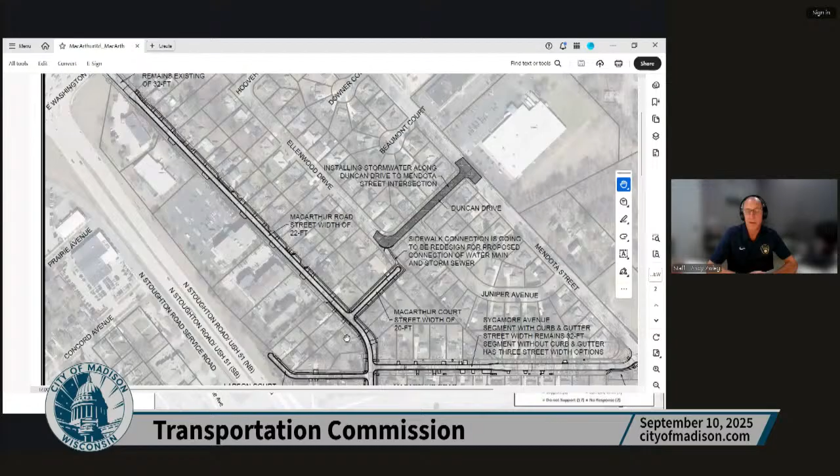Clearly the residents want folks to slow down, and keeping a narrow street is better. We also want to keep the street narrow so we have more flexibility to move the sidewalk in and out around the trees. So I would have put the trees down for a parking pocket, but I just want to let the commission know that I was open to that as we go through with the design.

Okay, I think I got it. And I don't know what the audio problem is at your end, but if you're having it repeatedly, you may want to check into that because it's really hard to get all the details. Really hard. All right, thanks. Maybe it's equipment, maybe the city can help you with some equipment. Thanks, yeah, it's something you should look into, Andy, for sure.

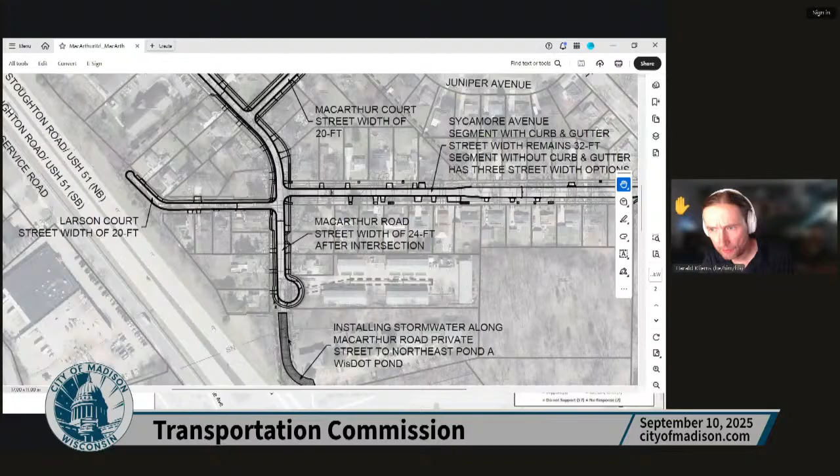Harold, go ahead. Thank you. Andy, I'm looking at the southern end of MacArthur Road where the multifamily housing is. I looked at street view of what it looks like right now. It's like a pretty narrow street that turns into a private road, and then to the left you have the driveway into those other buildings. So we're adding a turning circle, and I see that dotted line on there. So is that like a realigned driveway for the multifamily housing there?

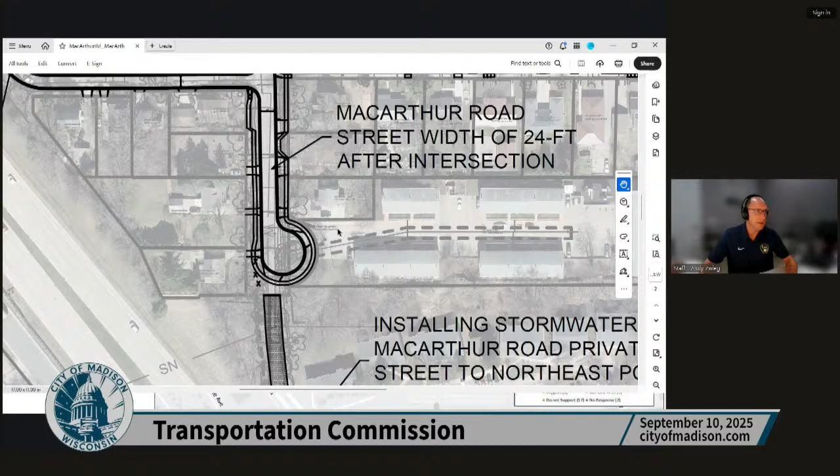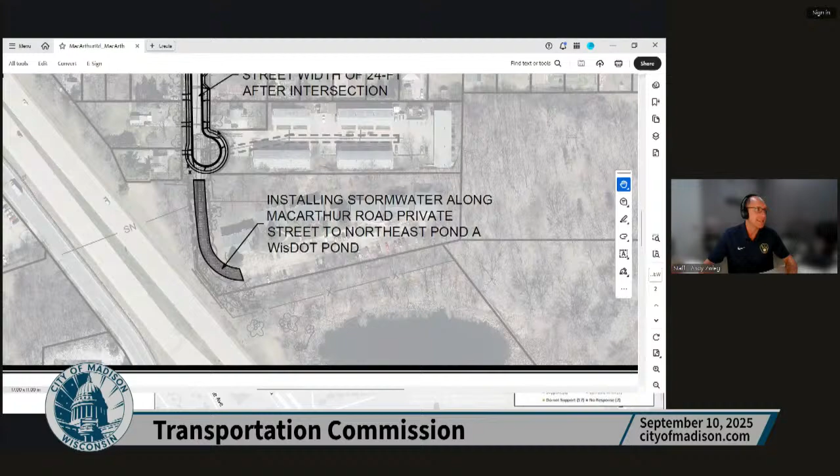That's right here. Yeah, that's a great question. I think probably... I see that, there's some sanitary sewer line work coming. I know I didn't mention this piece of MacArthur. Our sewer utility is planning on running a storm sewer pipe all the way down to this pond. So we're actually going to repave the driveway for this apartment complex. That's what that is. This dashed line is not related to any geometry, it's related to a sanitary sewer.

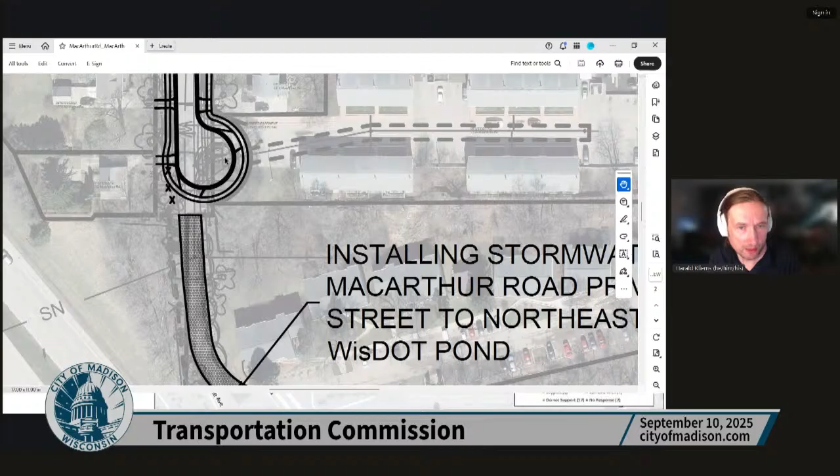And the existing survey is also on too, so what you're seeing here is some existing survey. Okay, yeah. So the curb ramp that I'm seeing there, that would be actual geometry, like on the top right.

Here, are you talking about? Yeah, the one to the right or north east. So I guess this is a driveway, this is a driveway, and this is a driveway, okay.

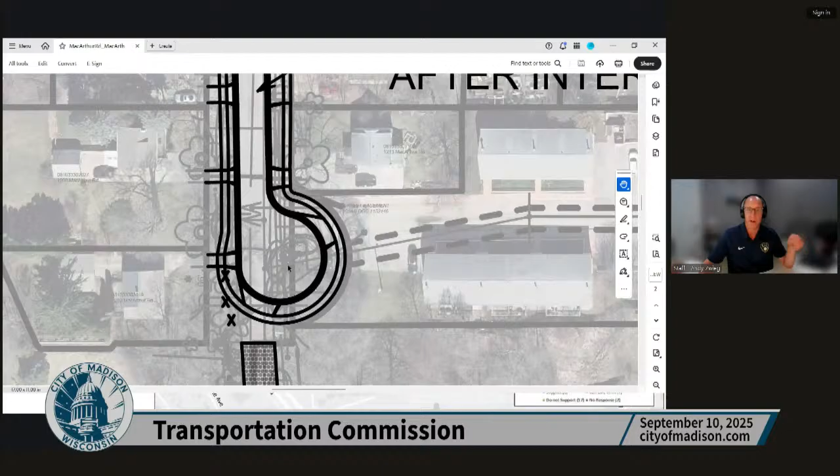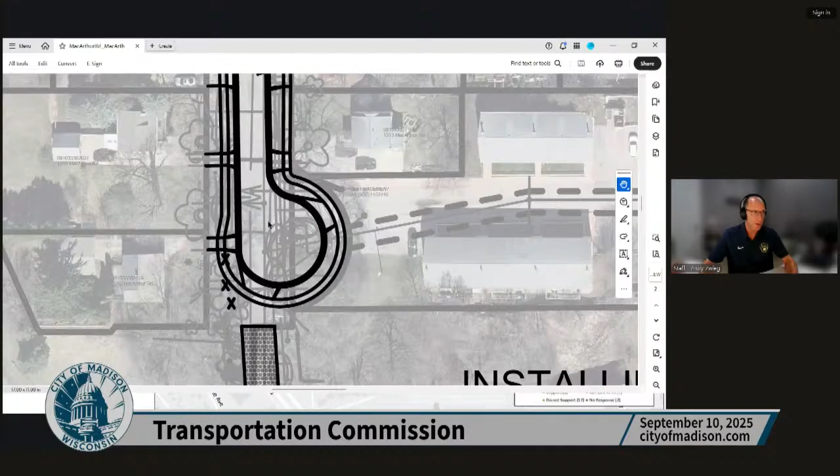So if you go down to the street view, you see right now you can't tell where the right of way is, where the MacArthur Road starts and the MacArthur driveway where this apartment starts. So our plan is to fix all that, make these driveways standard driveways that you enter from the street and not just have it be a free flow of cars down to this apartment complex.

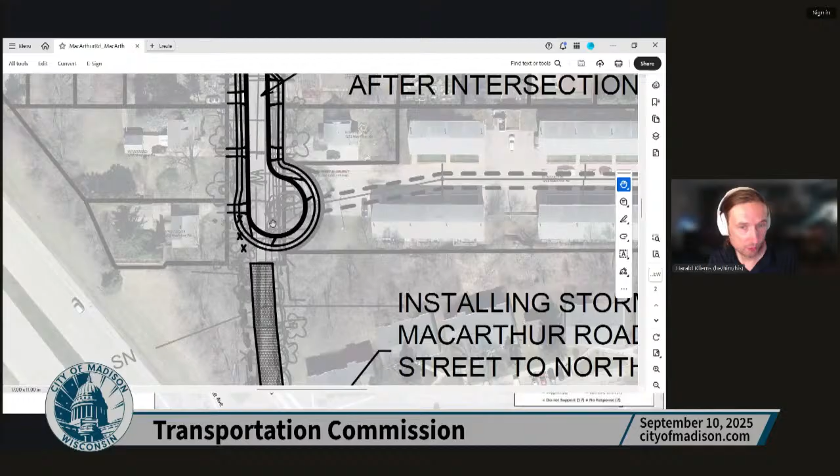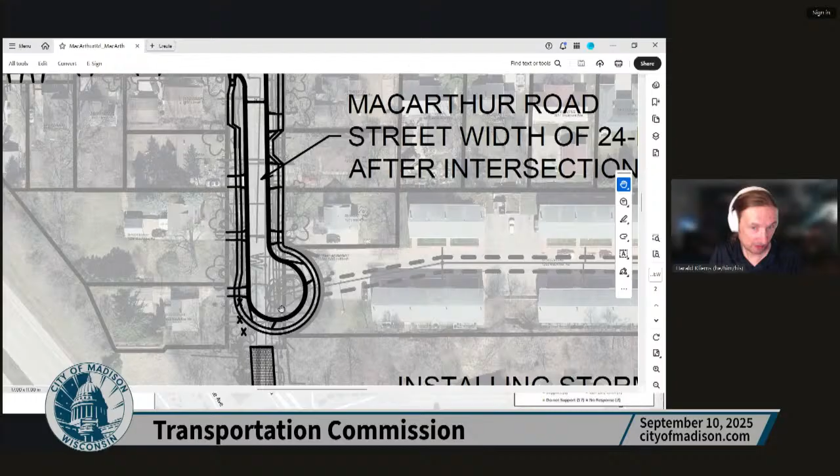Okay, my only piece of feedback, since this is the only area where it is those 3 trees, and it seems to be pretty close and you add that turning circle, kudos to making no tree removals with the whole thing and curving around trees, that's quite the achievement on such a large project. But maybe there's something where you can shift stuff, though probably not because that driveway edge is so close. That might be just one thing to look at.

Street. Thank you. Thanks, Harold. Other comments or questions?

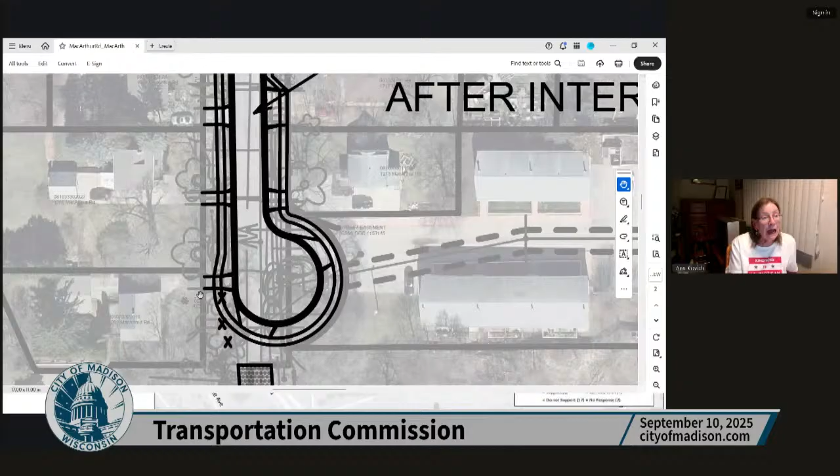So Andy's looking for a motion on the preferred option design. And that's really just for Sycamore, right, Andy? Because there aren't options offered for any of the other.

Correct, unless commissioners have thoughts about something else that was offered here where they want to see some changes other than on Sycamore. Correct, based on any feedback that the commission received, if you want any of the other geometry changed as well.

Okay, comments or questions? Anybody have any thoughts about a motion? Robbie?

Yeah, I'll go ahead and move that we go with the staff recommendation of option 2 on Sycamore, which would be the 26 feet with parking on one side and sidewalks on both sides of the streets except for Larson Court, which would have sidewalks on one side.

Yeah, I'm still writing here.

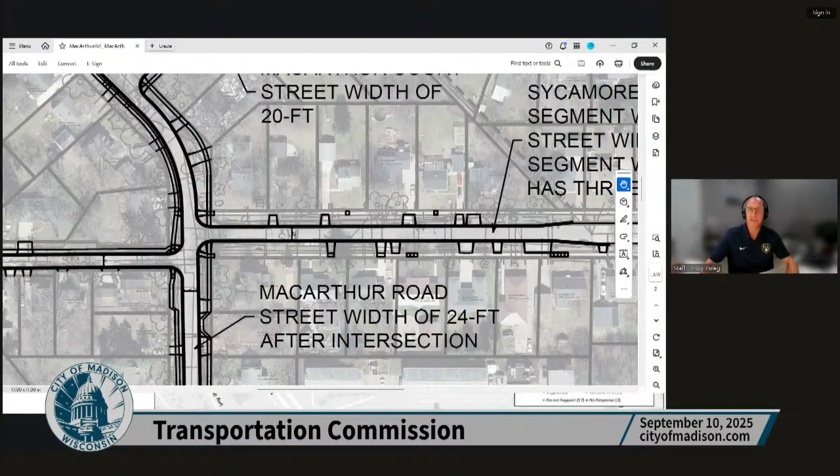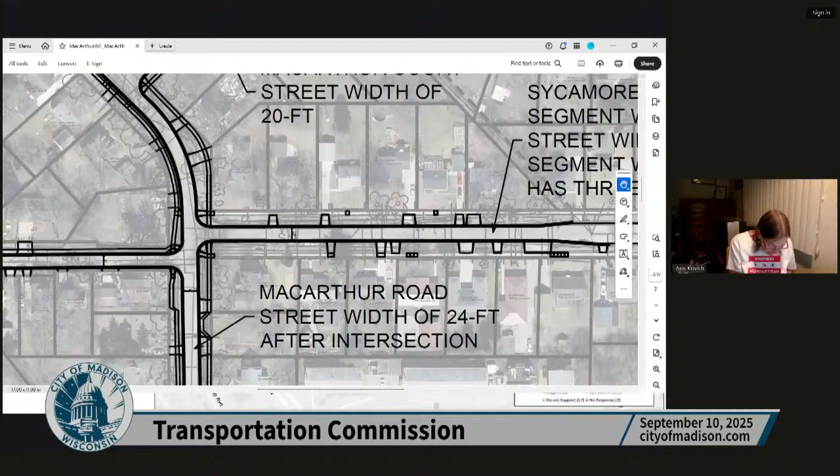Okay, I'm just gonna repeat it. Robbie made a motion, seconded by Chris, that we go with the staff recommendation of option 2 on Sycamore, which would be 26-foot street width, parking on one side, sidewalks on both sides except Larson Court, which has sidewalks on one side.

Can I clarify something? Is that the sidewalks on both sides are for all the streets except for Larson Court, because there was public feedback about MacArthur Court. And I wanted to clarify that staff had recommended sidewalks on both sides there.

Okay, how about if I say sidewalks on both sides on all the streets in the project except Larson Court, which has sidewalks on one side? Correct. Thank you.

Hard for me to write as fast as you guys talk, you know?

Okay, so I have moved that we go with the staff recommendation of option 2 on Sycamore, which would be 26-foot street width with parking on one side. Sidewalks on both sides and all the streets in the project, except Larson Court, which has sidewalks on one side.

Harold? I don't think this needs to go into the motion, but I just want to say this is fine with me. I just want to re-encourage Andy, before this goes to Board of Public Works, to do that additional outreach to the people in the multifamily housing so that they have an opportunity, if they have any concerns, to bring those to the Board of Public Works, which is going to make the ultimate approval of this. Thank you. Sounds good. Yeah, thanks, Harold.